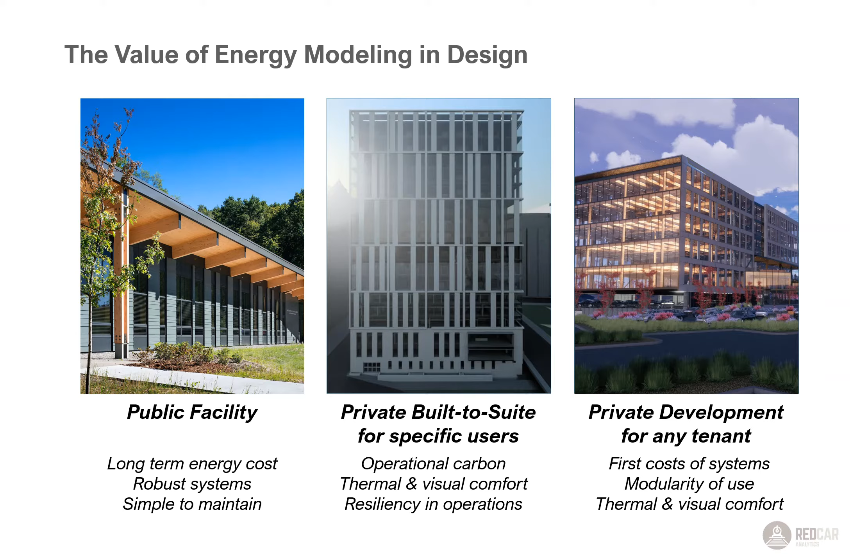So thinking about the values and the top values that your client might be weighing in their minds as they make choices can really then help inform what might be the right use of an energy model, and at which stage of design. So, thinking about the stages of bringing ideas together, designing and then building a building. Every project starts left to right with, we have all these different needs. We may have a schedule we've got to hit, a budget we need to hit, but we also have different aspirations.

We may want to bring great daylight into the space, make it very comfortable, and you need to start with this large amount of ideas and then work towards the convergence. Where do we find synergies in those, and eventually, how do we get that building built and buttoned up and delivered on time?

And so when I then think about using energy modeling during that process, I always go back to what is it I am delivering. So actually thinking about the deliverable and who is the client that's going to receive this deliverable. So am I at a point where I'm making a presentation to an owner who doesn't know a lot about energy? Or am I working with an architect who I've worked with quite a bit and understands daylight metrics and energy use metrics and benchmarking?

Or is this a utility program? Am I making a report for someone? Is this the permit set that needs to go in? So, what I'm delivering very much informs then what I need to do. So if we figure out what it is we're delivering, we then think about, well, let's outline the deliverable. What are the key info points we need to make? Is this a chart? Is this in cost? Do I just need a bunch of check marks against the things we know will make the building more comfortable? And really lay that out.

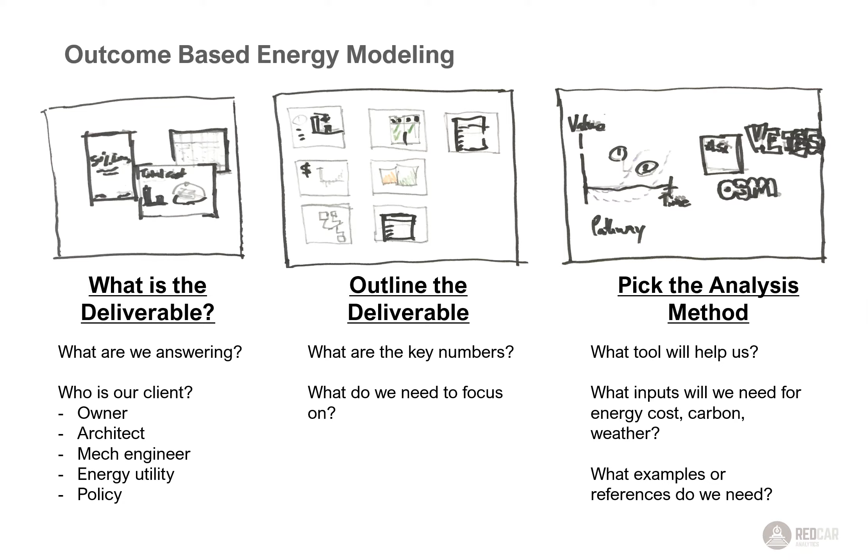Sometimes models are built just to inform the trade-offs between two things and really give the larger team an understanding of building physics. You got to remember that people that run energy models have much more interaction with building physics and building systems than most other people that design and create buildings. They all may know a little bit of that, but they don't spend their day in, day out studying that side of our industry.

So different energy modeling tools, all these tools can be used at every phase of design. Different tools I've experienced are better at different sides of this delivery process. I just threw these on here. I think when we work in projects, we do not generally tool hop, though I have in many instances used a very simple tool up front and then picked more of a full built-out suite of a tool to help create my permit model or help with some green compliance documentation I might need to do.

So I am quite a big fan of doing that and thinking about ways to maximize the value of the team and maximize the value of the time you have. Sometimes making one model for all purposes is not the best way to maximize those things and really give the best advice you can to the designers that are creating this building. So just take that with a grain of salt. But these are just examples, if you haven't seen these tools or you work in a few of these and you want to explore others, of where some might land.

So I wanted to give two examples today. I showed three building sectors, but I'm only going to share about two. And I wanted to talk about my public education building. So this was a nature center that was up in the Pacific Northwest. It gets pretty cold. And the building from the beginning of the design said we want to be a net zero energy building. And we also want to bring the right amount of sun into the building, get some passive heat, but we don't want to blind people in the summer. It's going to be a classroom. We can't have too much glare.

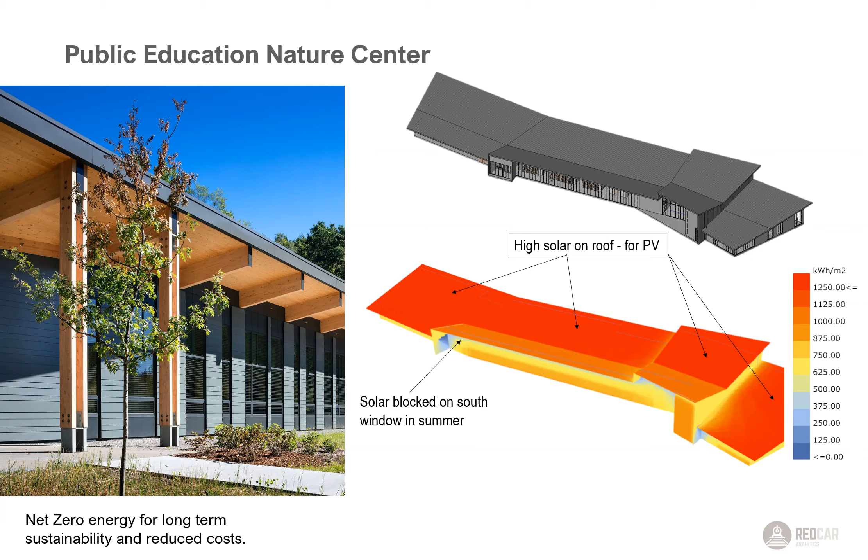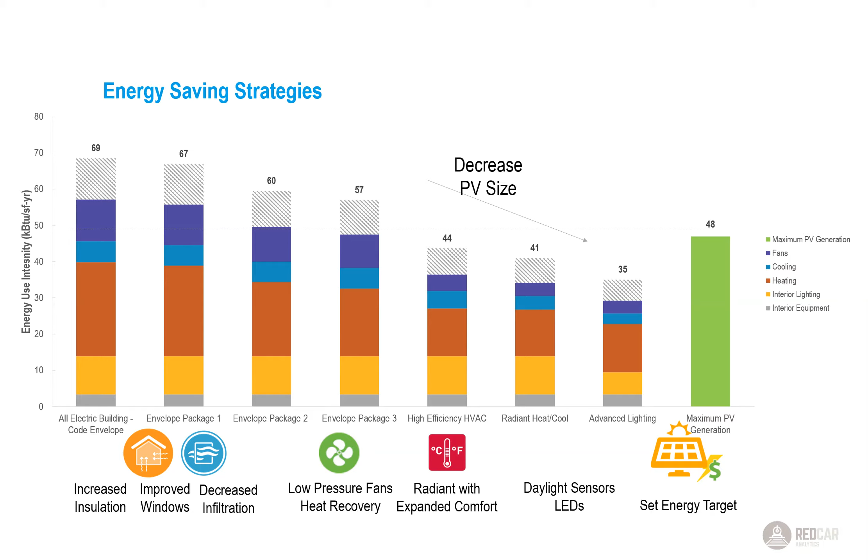And now the question is, what's more cost effective? Can we reduce the amount of panels we have to buy? Can we make systems more robust and easy to operate at the same time? So trying to drive those two goals for this project team forward as best we can in a clear way. You have to bring the team along. You have to teach them about what this number means, what are these end uses, and how do they relate to them. I mentioned the climate was cold, and it's a classroom. There's going to be little kids in the building coming to learn about their environment and their ecology around them.

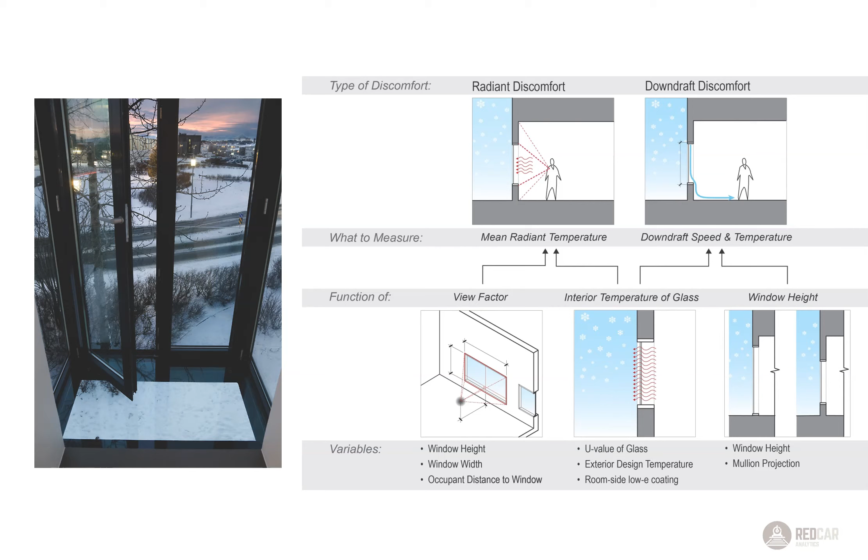And as we improve the frames or the thickness of the glass, we can get more and more people into the region where they should be comfortable, or we can at least reduce discomfort, in this case downdraft, that can occur on these cold windows. So this was just one way to sort of teach what are the drivers of cold discomfort and what are these options that they're actually pricing that we could then say have a different value to the user and the experience of the space.

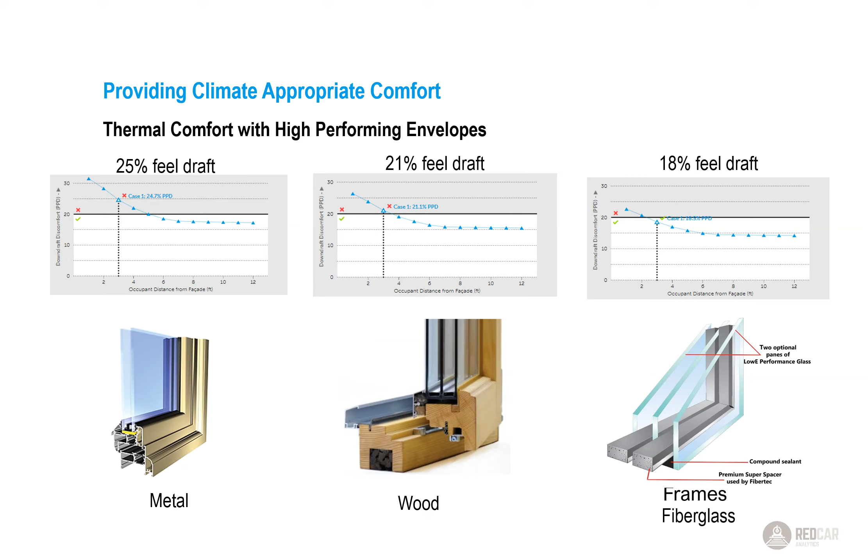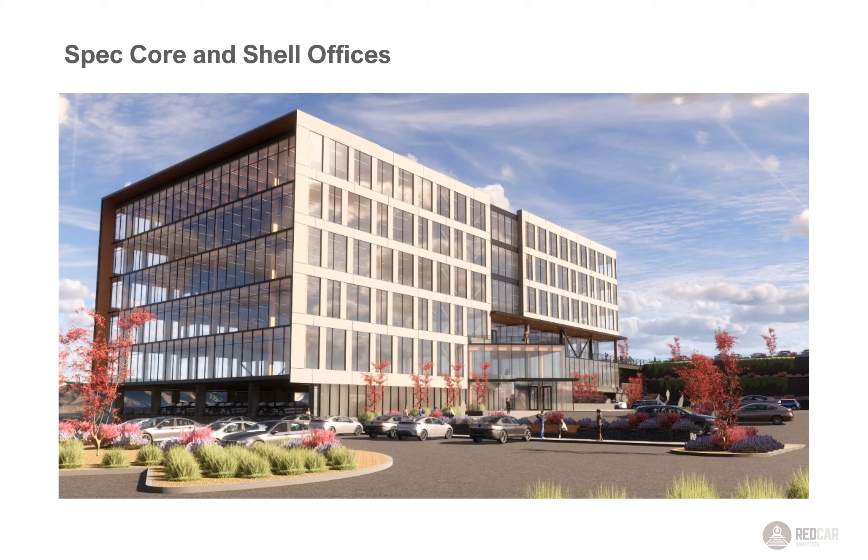But really for this building, while we did start there and have that be a portion of the conversation, we very quickly pivoted to thinking about the risk in terms of the comfort of this building and how the comfort can then dictate flexibility, knowing that we want this building to be flexible. It's a core and shell office building. We don't quite yet know where the walls are going to go inside, how many conference rooms are going to be on what side of the building.

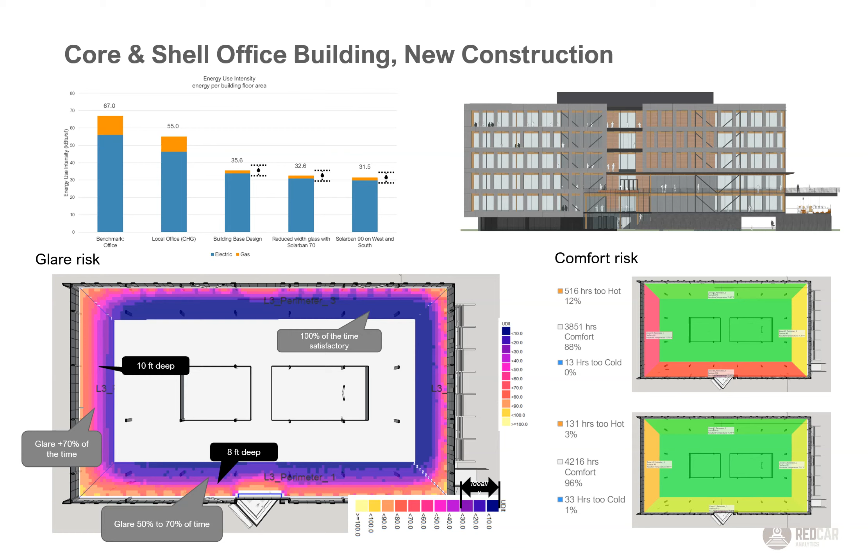And the other thing I wanted to share was just also thinking about, it can be powerful to teach these analytical charts. What are they? How can they be useful? Though I would always encourage modelers to also bring pictures of real buildings that either they've worked on or they're familiar with. And so this is a picture of a real building where they had a lot of glass.

What they did was they used the programming of the space to say, well, that's fine. We're going to have a lot of sun coming in on one side, and that's going to be our corridor. That's where people are going to walk. It's a transition space. We don't think they'll be upset about the glare. They're not going to be standing there for a long period of time. You can now see I just added some basic measurements to this chart on the left, and we can see that's a 10-foot space that is now set as their corridor.

Even on the north, people often don't think about it, but the north sky can be a big source of glare. It can be very bright, even if you're not looking at the sun. The sky itself is bright. And so, again, using a corridor as a walkway to reduce the amount of the sky that each person has to see out of the corner of their eye. That was the right solution for this building. This can be a great building with this amount of glass. Different strategies aren't always one size fits all. It matters what the end goal is for this building.

Another thing we looked at in the same developer building very early on is bringing other quantities out of our energy model for the team to weigh. We know that the west is going to need more air conditioning if it does have a lot of glass. And so we were able to help translate what we're looking at as a peak day on the west, showing where those peak loads would be in a number that our mechanical engineer could understand, BTUs a square foot, and how we could reduce that as we reduce the glass down, 31 BTUs a square foot.

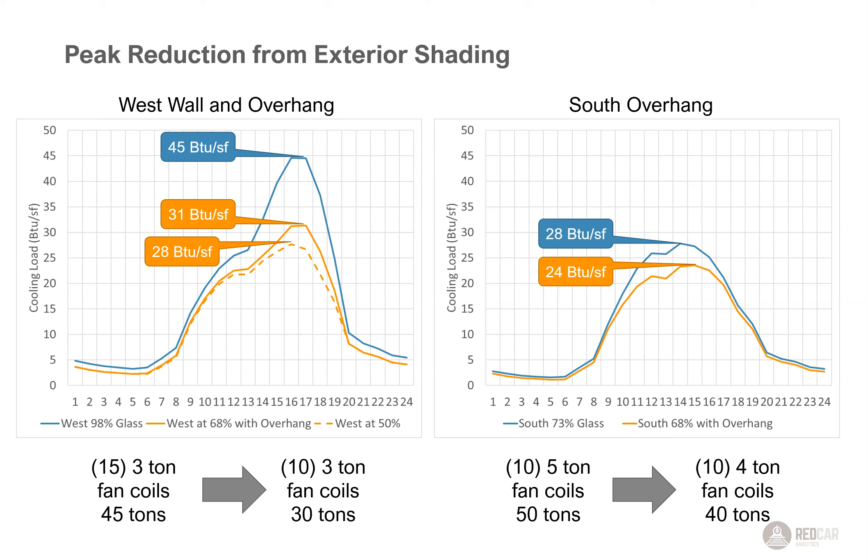So those are my quick takeaways and thoughts. I think energy modeling could be a great area to work and a lot of fun. You end up being a professional translator of different metrics to different people, and really thinking about, again, going back to this idea of who am I working with? What's their top motivator? They may want to see all the metrics under the sun, though being diligent with our time and effort to really maximize the value we can provide on teaching people about building physics, building energy and systems.